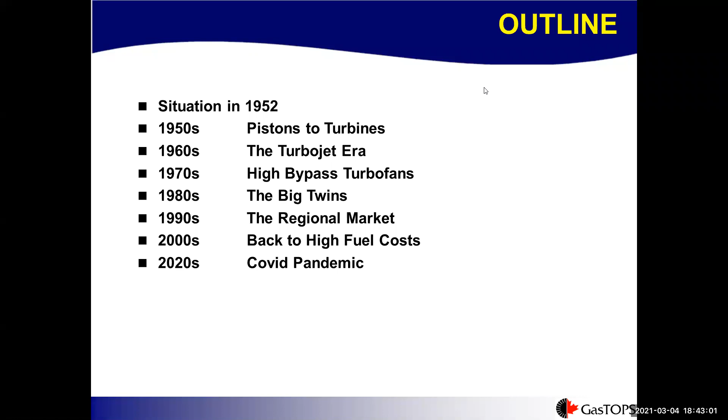So in fact, the Carleton students who are here, most of you would be born around about 1998, 2000 or thereabouts. And the 777 came into service in the late 1990s. So not much has changed since you were born. But we'll talk a little bit more about that. Next slide, please, Omar.

If you go back to 1952, every crossing of the Atlantic, nearly all went by ship. The air market — there was a small domestic US market, very small transatlantic, and negligible, I think in fact zero, trans-Pacific. And of course rail was transcontinental and local.

Now, I came to Canada in 1955, and nobody would have thought then of making a day trip from Toronto to Montreal or Toronto to Ottawa. That was an overnight trip by train. Next slide, please.

There was no leisure travel in the 1950s except for the mega rich, and there was no business travel. What drove travel in the 1950s was large-scale immigration. At the end of the war, there was very large-scale immigration from war-torn Europe to North America, to the States, to Canada, to South Africa, to Australia, to New Zealand. And that was all done by boat.

Immigrants didn't come by aeroplane. One of the common expressions of denigration about immigrants is, oh, he's just off the boat. And I was one of those too. So, next slide, please.

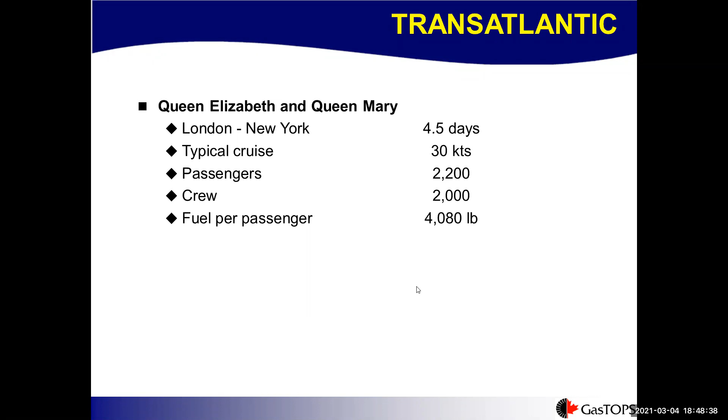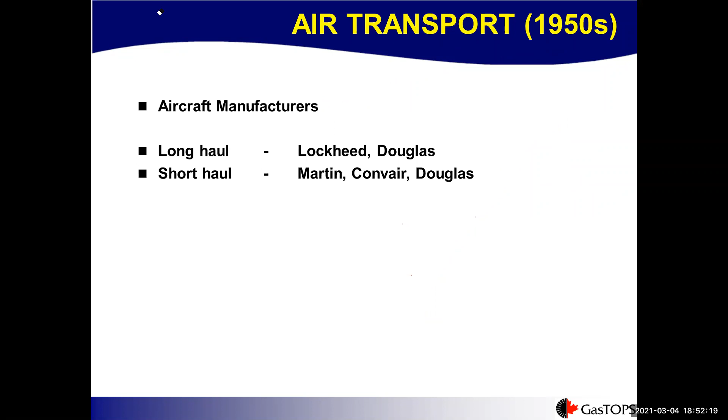Now I want to show you how the whole air transport business and the civil propulsion business has changed over the last 50, 70 years actually. In the 1950s, the major aircraft manufacturers were Lockheed and Douglas. The short-haul aircraft manufacturers were Martin, Convair, and Douglas.

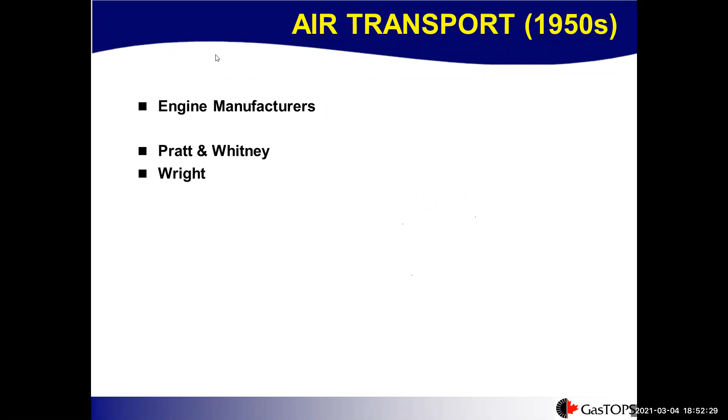The engine manufacturers were Pratt & Whitney and Wright. The dominant airlines were Pan Am and Trans World Airlines. The dominant aircraft were the Lockheed Constellation and the Douglas DC-7.

Now, if you look back at these last three slides, things have changed a lot. Probably most young people have never heard of Convair or Martin, except we now know of Lockheed Martin. Wright is not in the business anymore. Lockheed is out of the business. Douglas is out of the business. Pan Am and TWA both went bankrupt.

You notice I didn't mention a few names like Boeing, Rolls-Royce, General Electric, and Airbus, who have now essentially become a very large part of the current market. It boils down to the fact that companies that didn't remain competitive with their products eventually disappeared. So you have to remain very active in research and development to keep going.

All these were household words when I started in the business. A lot of them have gone now. People like Boeing, GE, Airbus, and Rolls-Royce have appeared in the market.

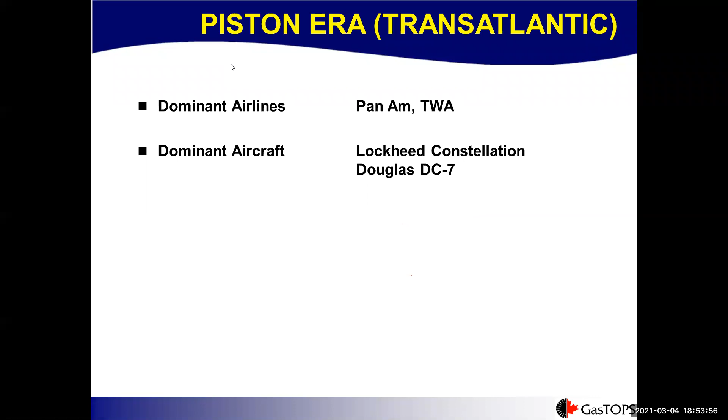Now, this was Air Canada. Air Canada flew with the Lockheed Constellation, which is a beautiful aeroplane. But my first transatlantic crossing was well over 14 hours with a stop in Iceland.

My first crossing was from this end and coming back. Coming back from Glasgow to Toronto, I had the misfortune to come on a Lockheed L1049H - those of you who might recognize the H, that's the cargo version of the Lockheed Constellation. Quite apart from no in-flight entertainment and no back-of-the-seat screens, there were also no windows, so it was an enclosed tube. You sat beside this vibrating wall for 14 hours. And I can assure you it's much, much better to fly in a modern aeroplane than it was in those days.

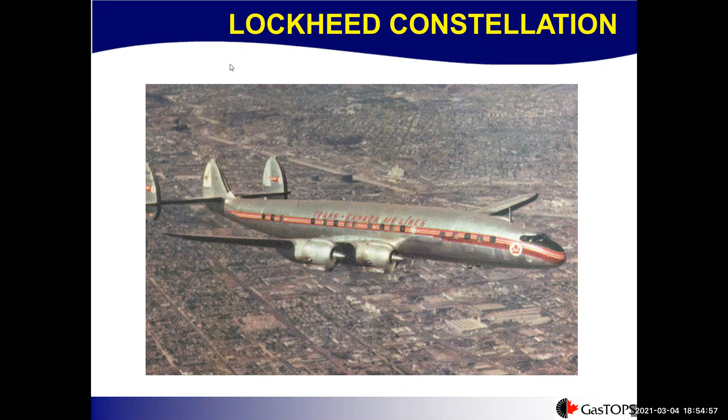Now, these again were numbers I worked out on the back of an envelope as best as I could. The typical cruise speed of the Lockheed Constellation was about 275 knots. Difficult to handle the number of passengers, but about 74 was the best reasonable estimate I could get. And it had a flight crew of 5.

It's important to realize this flight crew of 5 consists of 2 pilots, a flight engineer, a navigator, and a radio operator - that didn't count the 2 or 3 stewardesses in the back. And again, estimated fuel per passenger was about 520 pounds - that's just a good estimate. But you see, that's already about 8 times better than the Queen Elizabeth or Queen Mary. And of course, in those days, nobody worried about fuel or the environment in the slightest.

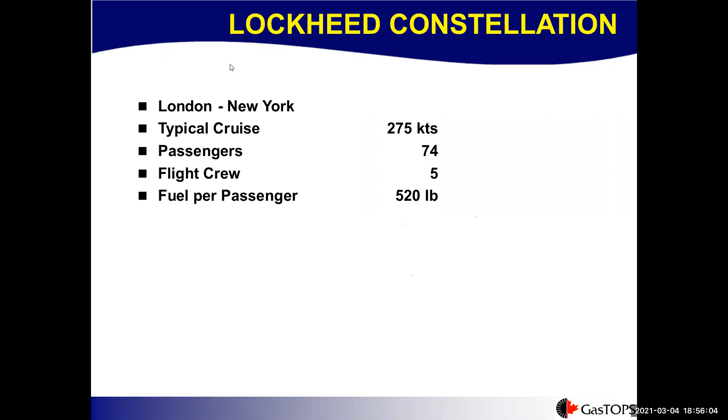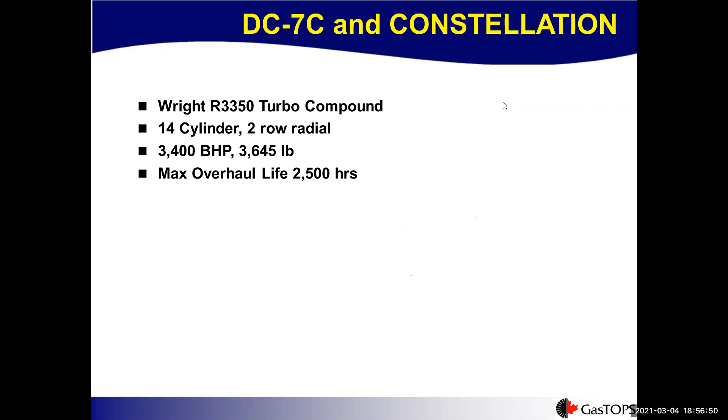The DC-7C and the Constellation both had the Wright R-3350 turbo compound. We much later had that in the Argus, the CL-28, a 14-cylinder 2-row radial, basically about 1 horsepower per pound. Now, those engines had a maximum overhaul life of 2,500 hours. They very seldom achieved that, and it took them 17 years to get there. But the point was that they couldn't go beyond 2,500 hours. That sounds like a pretty silly number by today's standards, but that's the best you could get with these piston engines.

Now, the interesting thing about the Stratocruiser was that Boeing built only 55 of these. It was actually based on the wing of the B-29 bomber, and 13 of these finished up as hull losses. It could carry, I think, 61 passengers across the Atlantic eastbound and 55 westbound, again because of the wind.

There's a very good paper where the chief engineer of Pratt & Whitney said the in-flight shutdown rate in the R4360 was simply intolerable. It was too dangerous even to quote a number on it. So, next slide please.

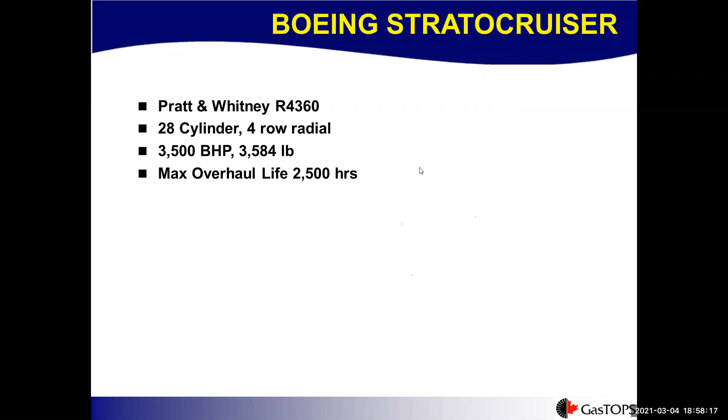So the transition to turbines: the Constellations, the DC-7s, and the few Stratocruisers started to open up the market. But people began to realize that maybe the day of the piston engine was coming to an end. So there were two camps that opened up, turboprops and turbojets. When I was a student, there was a great argument going on about which was better, the turboprop or the turbojet. In fact, the answer was the turbofan.

But the point was, in Britain, they came up with two turboprops, both quite successful. The Viscount, and in fact Air Canada was, I believe, the biggest ever user of the Viscount. The Viscount came on the scene just before I got to Canada. They also built the Britannia, which was in fact a long-range aircraft, and it sounds incredible today, but the Britannia actually did non-stop flights from New York to Tel Aviv.

Lockheed also went for turboprops with the Electra, intended for internal use within Europe and North America—a fairly restricted range aircraft. Unfortunately it had a major flutter problem with connectivity between the nacelles and the wing, sufficiently serious that the wing came off, and the Electra was a commercial failure. Of course, the Electra became the father of the P3, and we still have P3s flying 70 years later. They're coming to the end of their lives too.

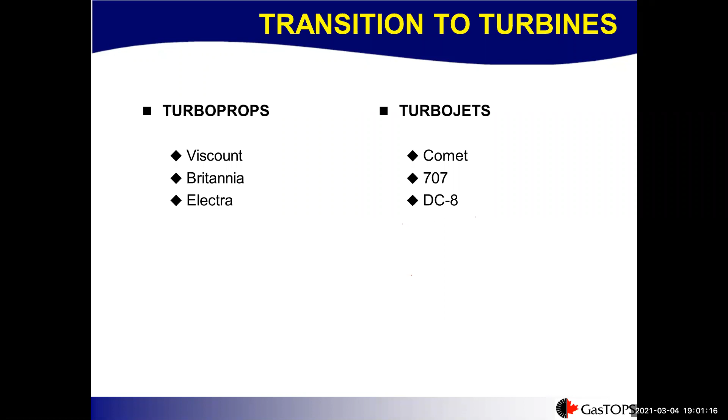Okay, if you look at the turboprops: the Viscount had the Rolls-Royce Dart, a two-stage centrifugal compressor. The Britannia had the Bristol Proteus, an axi-centrifugal compressor. The Electra went with the Allison 501, all axial, and the last big turboprop was the Vanguard with the Rolls-Royce Tyne, which was all axial. The Vanguard is interesting—there was a very good paper in the CASI journal, way back in the mid-50s, by Jack Diamond, who was the chief engineer of Air Canada, about the Vanguard.

And it didn't even mention propulsion as being important—fuel was simply not important in those days. The Tyne was in fact quite a big turboprop for its day, 6,000 horsepower, and it became later used a lot in naval engines as well. Next slide, please.

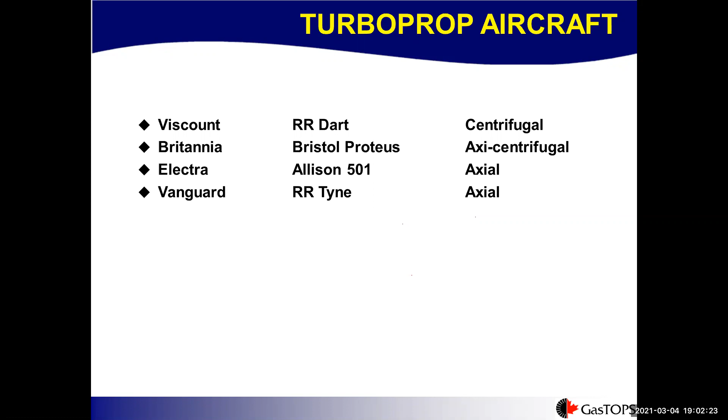This, in fact, originated in the Bell Airacobra P-39 World War II fighter, where the engine was mounted quite far back with a very long drive shaft forward to the propeller, running in between the pilot's legs. The T-56 has been a remarkably successful engine—there are still lots of them around. It's been developed to higher and higher standards, with at least 12 to 15,000 built. So, next slide please.

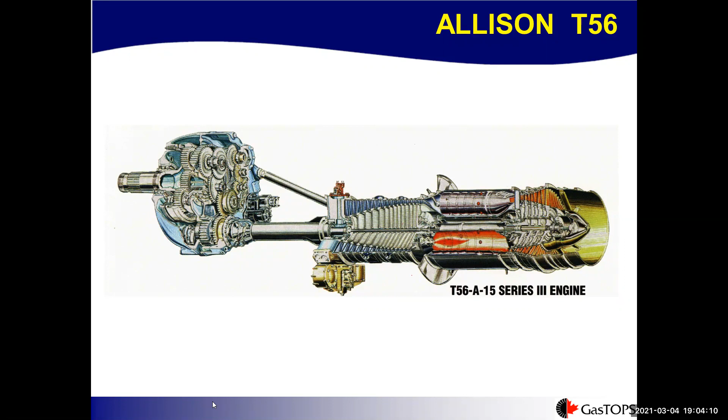Now, the Vanguard was fast, it was reliable, it was very safe, and they sold a grand total of 43 to Air Canada and to British European Airways. So it was actually one of the very first aircraft that was, when it was being designed, in fact referred to as an Airbus, something to provide cheap transport, and it was a complete flop in the market.

Okay, so then we leave the turboprops just now. We'll come back to it a bit later. But the transatlantic service by jet started, I said, October the 4th, 1958.

There's a very important date, that in 1958 the Atlantic passengers by air exceeded those by ship for the first time. And what really happened was that the ship market peaked in 1958 and disappeared rapidly, whereas the aircraft market just kept on growing and growing. And the speed and economics of the initial jets brought the cost of fares down, and it made it possible for the working stiff to go for a 2 or 3 week holiday to Europe for the first time ever.

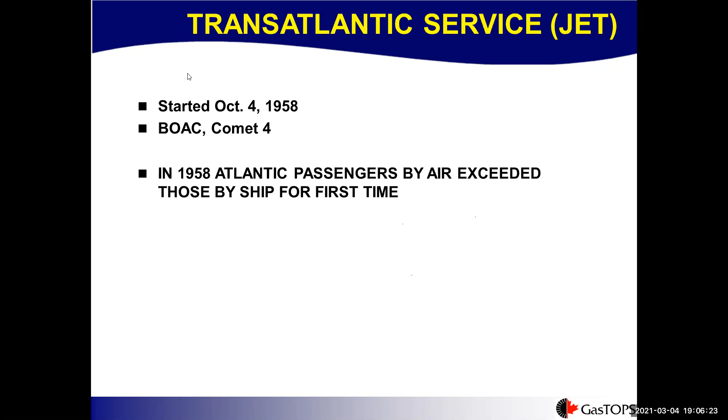Now, I grew up on the Clyde, which was the world center of shipbuilding. I was as interested in ships as I was in aeroplanes, and I could never have guessed that 10 years after I graduated, basically the building of passenger ships was finished. Now, we still have passenger ships, of course, but they have nothing to do with transportation. They're floating resorts. Cruise ships are just basically hotels that move around.

Now, if you look at the sea versus air picture, in 1958 they say that air travel exceeded that by ship. The QE2 was the last big liner built in the UK, launched in 1967. The original Queen Elizabeth was withdrawn in 1968. The United States built a large, very fast liner called the United States, which only did about 10 years in service before it was withdrawn.

And the ship traffic was basically killed by the jet engine. One of the things that killed the ship traffic was that a great deal of the market was the immigrant trade from Europe, particularly to Australia. And the Australian government found it was much more economical to rent a 707 and fill it up with people and fly them to Australia in a day and come back. That wiped out ship traffic literally almost overnight.

The Dutch, in fact, also had a lot of these ships that would come back - they'd go full of immigrants one way and go back almost empty. But they did, in fact, carry a lot of cargo and the Royal Mail, which kept them going. But that traffic pretty well disappeared and was totally replaced by long-haul jets.

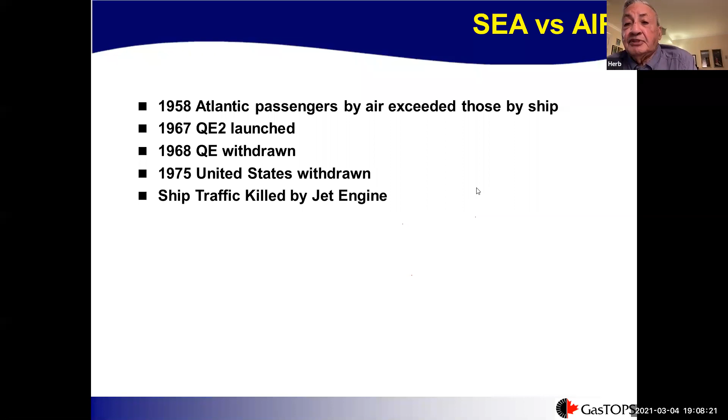It's interesting that the year after I was born, they opened the air route from London to Sydney, known as the Kangaroo route. And younger people find this hard to believe, but when the Kangaroo route opened in 1934, it took 42 stops to Australia and took 12 days. So we've certainly made some progress from there.

Now let's look at the early jet-powered aircraft. The Comet 1 had the de Havilland Ghost, which was a centrifugal compressor engine with a low pressure ratio and quite inefficient. The 707 had the JT3, which was in fact a civil version of the J57 military engine. The Comet 4 had the Rolls-Royce Avon, which was also started as a military engine. And the DC-8 had the JT4, which was a civil version of the J75. And of course, the J75 was used in the prototype of the Avro Arrow.

It was certainly clear that for a big efficient engine, it was going to be all axial, and the centrifugal was just something to get things going. It was much earlier and quite inefficient. They did, in fact - the Comet, British Airways, or BOAC as it then was, actually did fly the Comet from London to Tokyo with 9 stops, and from London to Johannesburg with either 5 or 6 stops. So again, totally different from what we know today.

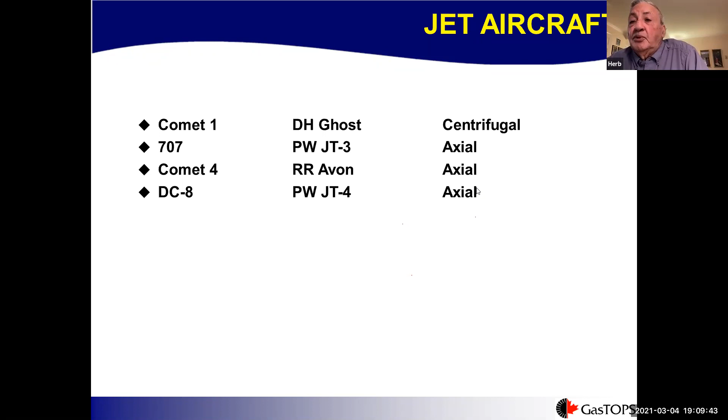Next slide, please, Homer.

Now, if we look at the pressure ratio, turbine temperatures, and thrusts of these engines, they seem quite ridiculous by what we know today. Pressure ratios of 10 or 12, turbine temperature 1150, 1135, 1205. Now if you look at a modern civil engine with a pressure ratio of 60, the compressor delivery temperature is about 1100 Kelvin.

And the pressure ratios have gone up from 10 to 50 or 60, and thrusts have gone up to about 115,000 pounds, the maximum so far. Next slide, please.

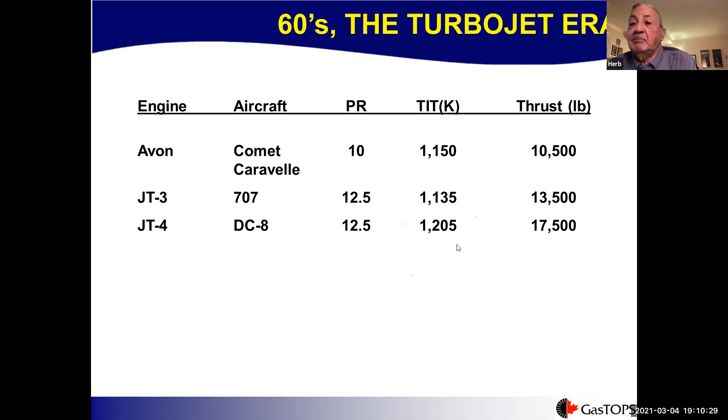The problems with the turbojets were, first of all, the SFC, specific fuel consumption, which is a measure of the thermal efficiency of the engine and includes the propulsive efficiency, but also the high noise problem. Both of these problems resulted from high jet velocity. So the solution to improve the SFC and reduce the noise was to increase the airflow and decrease the jet velocity.

So basically thrust is fundamentally just the mass flow into the engine times the change in velocity. So you can either have a very large mass flow and small change in velocity, which is what the propeller is doing, or a small mass flow with a very high jet velocity, which is a straight jet engine. The turbofan, as we know it today, is in between these and has led to tremendous increases in performance over the years. Next slide, please.

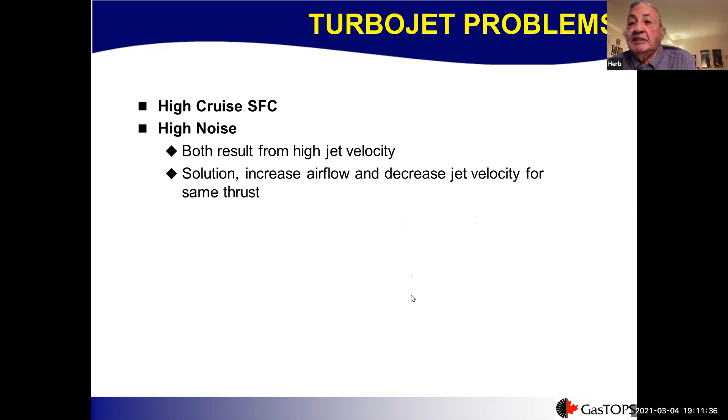So if you look at the early turbofans, the JT3D was in fact a modification of the J-57 to put a fan at the front, and that went on to both the 707 and the DC-8. And the thrust, you see, went up to 18,000 pounds.

The JT8D was a conversion of a smaller military jet engine. Forget which one it was, I think it was the J-58... no, it wasn't 58, never mind. But the point was the JT8D went into the 727, the DC-9, and the 737.

Now if you look at that there: 707, DC-8, 727, DC-9, 737, that is about 95% of the civil market. Pratt & Whitney owned that market. Rolls-Royce had a tiny, tiny share. GE weren't there at all, and Wright had disappeared by this stage. So Pratt & Whitney had domination of the market like nothing's ever been seen before.

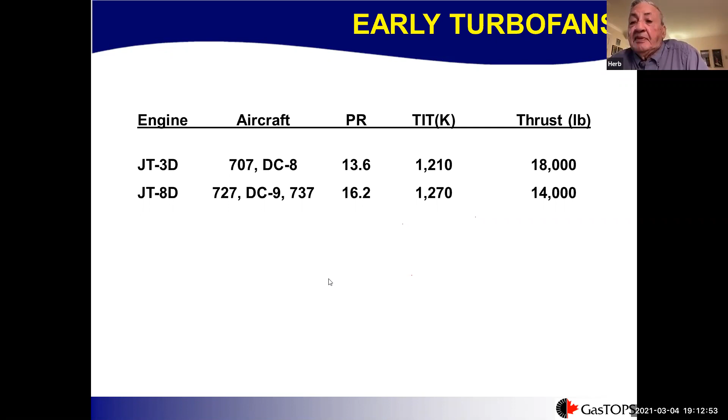Next slide, please. Okay, this is the JT3D, which has got the two-stage fan and a low bypass ratio, a bypass ratio just over 1. Next slide, please.

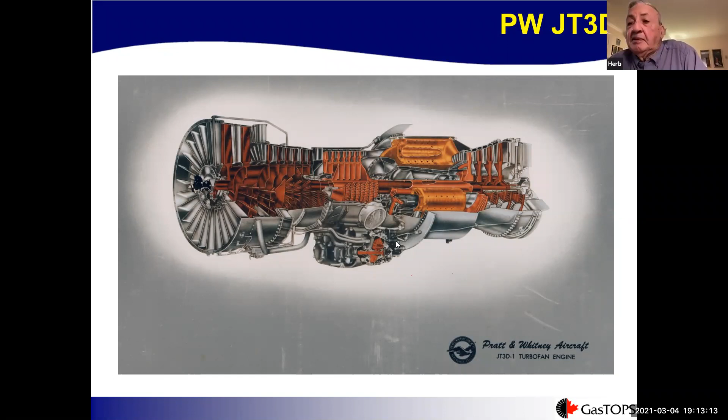Again, the JT8D has a very low bypass ratio, a bypass ratio of about 0.8, I think it was, on the JT8D. But that was, in fact, for a long time, the most widely produced engine in the world. Now the JT8D is pretty well all gone now. There were still quite a lot of them around in the 737-200. The 727's been gone for quite a few years.

And what was First Air and then Canadian North did fly JT8D-powered 737s up until quite recently, but they're pretty well all gone now. Next slide, please.

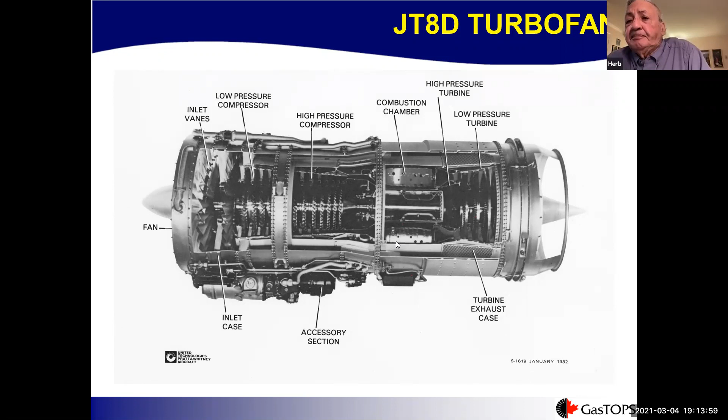So for turbofans, what we wanted to do was increase the bypass ratio to improve the SFC and lower the takeoff noise. There were a lot of problems with the design and introduction of big high bypass turbofans. You needed long fan blades. There were big problems with 3D aerodynamics. People didn't know enough about the high Mach numbers at the blade tips or the tendency of the flexible blades to untwist.

Materials were a problem, particularly with bird strike resistance. And if it was not for titanium, we could have never gone to the big turbofans. If you'd made the fan blades out of aluminum, they would have been unable to withstand the bird strike. And if you'd made them out of steel, you could have never made a disc strong enough to hold the blades with the diameters needed.

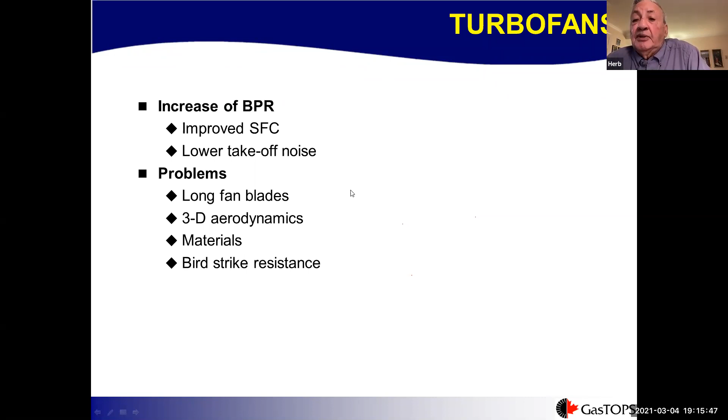So we started off with solid titanium blades with dampers halfway up, or two rows of dampers. We finally moved to wide chord blades without dampers. We went to hollow blades, and you may have heard just a week or so ago there was a fan blade failure on a 777 on a Pratt engine. But the point was that titanium was the key to being able to go to a high bypass ratio. Many years later, we finished up going to composite blades, and we're still getting better at that, but they've been in service for quite a long time now. Next slide, please.

Now the large turbofans, particularly the high bypass ratio ones, started with the military transport program in the US, the C5A. And GE came up with the TF-39 engine with the unheard of bypass ratio of 8. Look at the next slide, please.

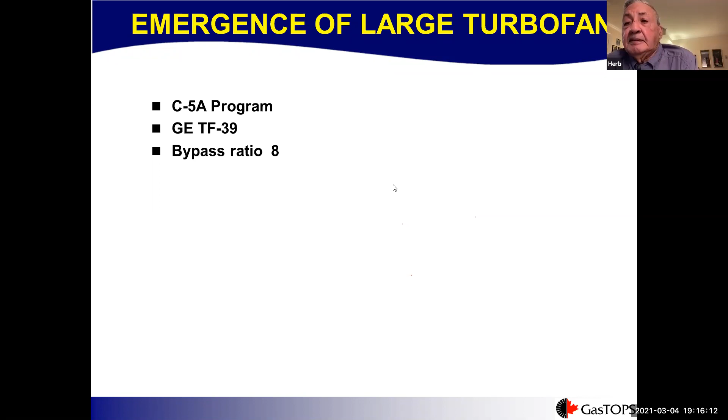...the General Electric LM2500, which has been the most successful aeroderivative engine ever built, and they're still building lots of these. In the case of naval ships, they have the 6-stage turbine with a gearbox to drive the propeller. But if you want to drive a compressor in a pipeline, you'd have a 2-stage turbine running at much higher speed, directly coupled to the compressor.

But that basic architecture of the TF-39 was ideal for the C5. For the C5, they wanted good short field performance, but weren't so concerned about cruise speed, and weren't the least bit concerned about noise. But that was unsuitable for a civil engine, and all civil engines, for noise purposes, have to have a single-stage fan. Next slide, please.

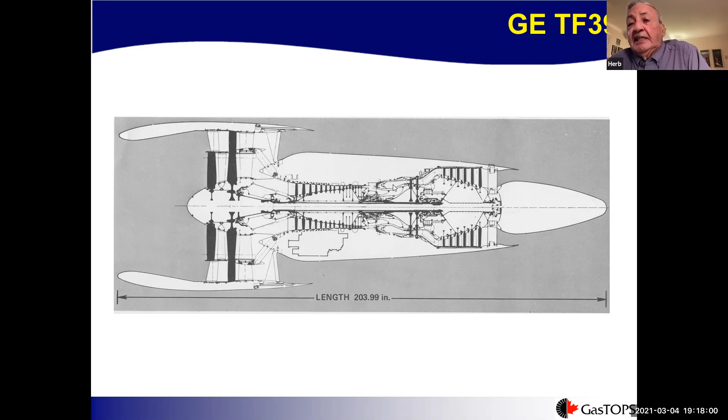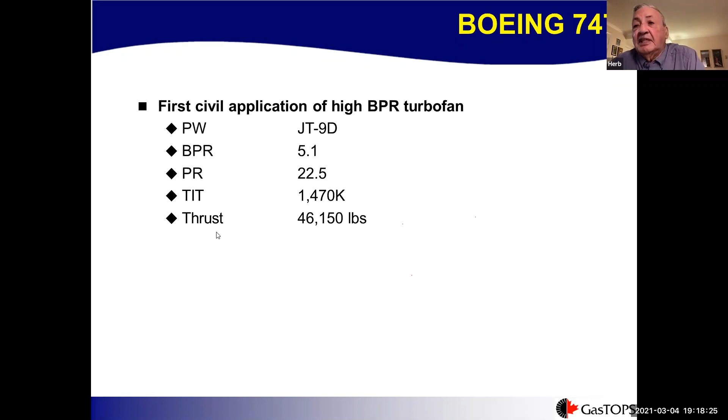Now, Douglas and Lockheed didn't want to get left behind on the high bypass wide body, and they came up with a couple of competing tri-jets, the DC-10 and the Lockheed 1011. The DC-10 went with the GE CF6-50, which was a bit like the TF-39 with a single-stage fan, and the Lockheed 1011 went with the Rolls-Royce RB211, and the cycle conditions were pretty much the same on all of these.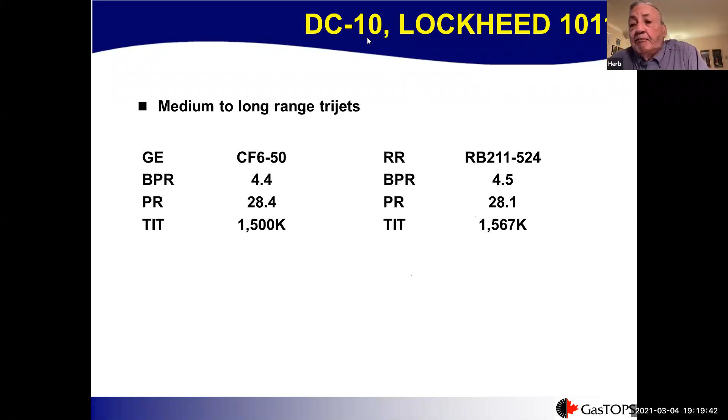The big difference with the Rolls-Royce engine was they went to a 3-spool engine. The interesting thing is that architecture on the GE engine and the Rolls-Royce engine has lasted for the last 50 years, more than that actually. And Rolls are just now looking at this Ultrafan where they've gone to a completely new architecture. I believe GE are looking at a geared fan engine, but nothing has that yet. I believe they will have to be, because with the increasing bypass ratios people are going to, you eventually have to go to a gearbox because the low pressure turbine becomes so massive. So the next slide, please.

Now, there were some terrible reliability issues when these first came into service. Turbine blade life was a major problem because the blade temperatures were much higher than we'd had before. They required the use of advanced cooled blades. And I know that when British Airways first introduced the 747s, they were having to change out a high pressure turbine once a week because the blade life was so poor. And that was not a Pratt problem - that was a problem with all of them because of the high temperatures.

But a particularly odd problem on the JT9D was the engine had been perfectly good, tested on test beds, but when they actually mounted it on the pylon on the 747, when it went to full power, the casing went oval. This meant they had to open up all the tip clearances, and that cost Pratt & Whitney a huge amount of money to put right, because the performance of the engine lost so much from these big tip clearances.

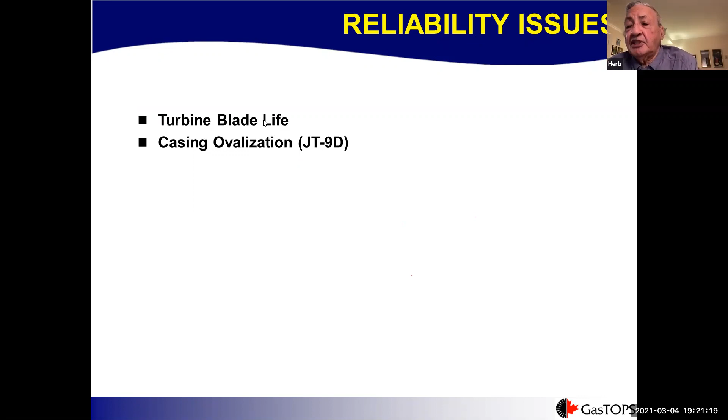But all of the big engines to start with had reliability issues. Now I should point out, I'm not going to throw boulders at any engine company, because what you find happening is that when you go to a new engine and push the technology to higher temperatures, higher pressure ratios and higher speeds, you're going to have trouble, period. Doesn't matter who you are. It's a case of how long it takes you to fix them. Okay, next slide, please.

Now, nobody was very keen on the idea of going to 3-engined aircraft across the Atlantic. I actually went on a DC-10 across the Atlantic the day after it had its certificate of airworthiness restored. The DC-10 lost its C of A for quite a long time because of structural problems, with the floor collapsing and interfering with control cables and whatnot. But anyway, the Lockheed 1011 and the DC-10 were initially conceived as transcontinental aeroplanes, like London to Los Angeles, New York to San Francisco, that sort of thing, but not transatlantic. Nobody in their right mind would have considered twin-engined aircraft across the Atlantic. And I know for sure that when I first crossed the Atlantic in a 3-engine aeroplane, I was none too happy about it, especially since a lot of these engines were designed by guys that I taught, and they were no smarter than I was. Next slide, please.

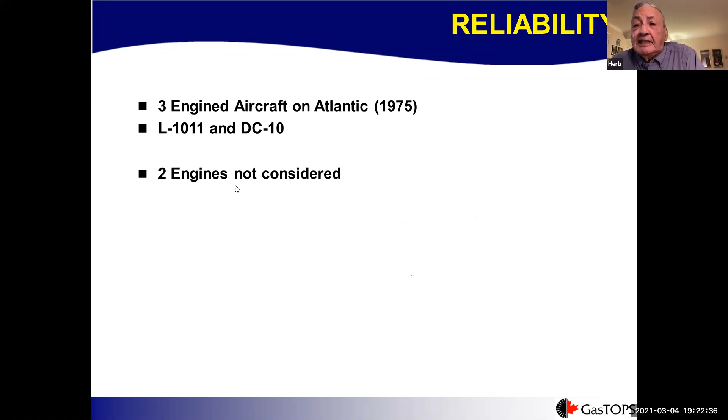Now this is interesting about reliability. As I mentioned earlier, the large piston engines had a 2,500-hour overhaul life after 17 years. But the JT4, the first big jet engine, the J75, in service after only 3 years, had achieved 3,400 hours overhaul life.

For quite a long time now, engines have achieved 40,000 hours on wing without being removed. This was done first with Icelandic on an RB211 and 757, and later with Malev on a B737. I think somebody recently, TUI in Germany, with the CFM56 and the 737, got over 50,000 hours. Now that's an astonishing feat.

I have read that the average time for a CFM56 before it goes for its first shop visit is 22,000 hours. It may be even higher than that. That's an incredible level of reliability.

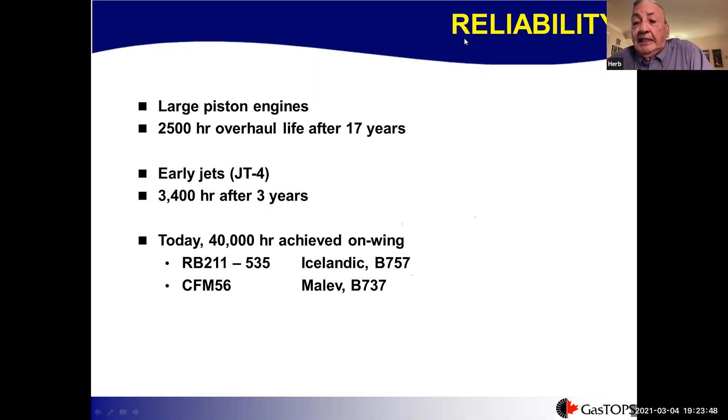The big twins. Now, Airbus were the first to come up with a big twin, and it made its first flight in 1972. At that point it was a short to medium range aircraft.

Now, this was poo-pooed in the US. I was as polite as possible at the Guggenheim lecture when I said there was considerable doubt in the US about large twins. They basically poured scorn on this and said nobody but these daft Europeans would build a big twin. And then they realized maybe once the engine reliability got better, it wasn't such a bad idea after all.

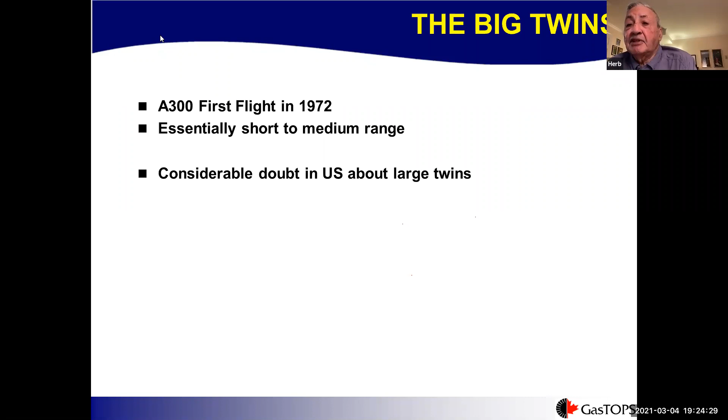ETOPS, extended twin overwater operations, started in 1987 with the B767 and the A310. Now, the A310 was never really designed as a long-range airplane. I remember a CASI lecture when somebody from Airbus came to give a talk on the A310, and they couldn't get their slide into the projector, had to use a screwdriver to push it in. They were so determined to show that the A310 had a much smaller wing than the B767, and that was the reason why it didn't do very well.

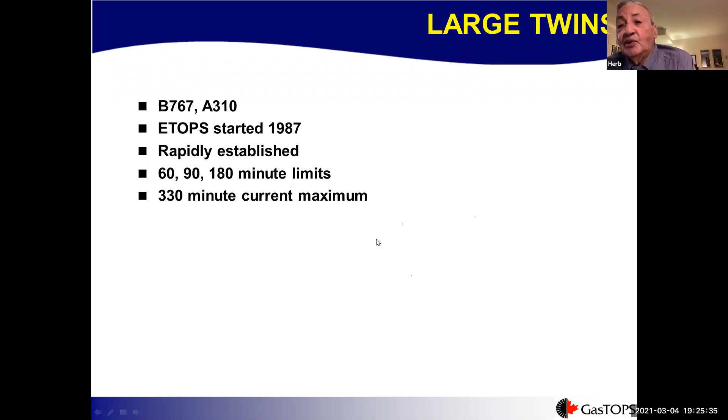Boeing had a big wing to start with, and they rapidly established increasing range. We started off with ETOPS 60 minutes, rapidly extended to 90, 180 minutes, and now we've got to the 330-minute current maximum. That's quite incredible when you think of it, 5.5 hours on one engine, carrying all the extra loads and whatnot that would have been carried by the other engine.

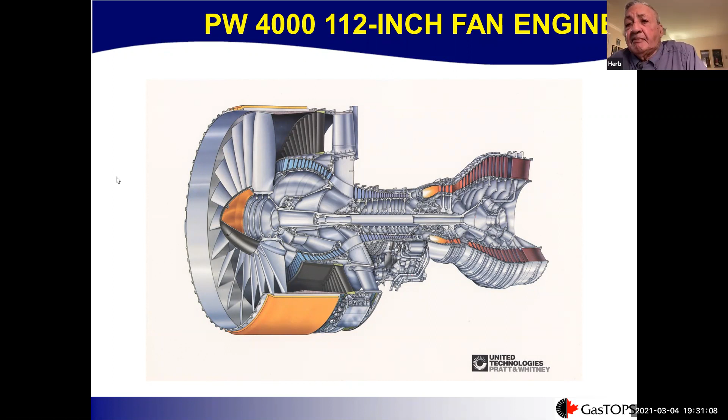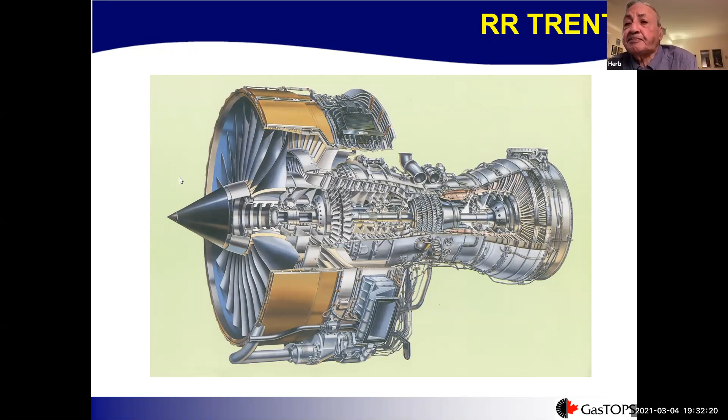Now, the geared turbofan developed by Pratt & Whitney, when they say 15 to 20% improvement in fuel efficiency, that is true, but it's based on the engines of 10 years ago. We're at a stage now where it's very, very hard to get even a couple of percent improvement on SFC. And everything you do to improve the SFC is going to affect the reliability and also the cost of the engine.

The gearboxes take a lot of power, 20 to 50 megawatts. The ultrafan that Rolls are looking at, they've already tested the gearbox to something like 80 megawatts, which is enormous power. Although the geared turbofan has had a lot of early reliability issues, quite a few in-flight failures, the interesting thing is I don't know of any related to the gearbox. A lot of them have been in the low pressure turbine, because they went to newer materials in the LP turbine, titanium alloys in the last stage. But the point is the gearbox appears to be highly reliable.

For the young folk in the audience, the geared turbofan has had a great deal of acclaim recently, and quite a lot of people think it's something new. But in fact the first successful geared turbofan was the AiResearch TFE731 business jet engine, which was certified in 1972, and at least 12,000 have been built. So the geared turbofan has actually been around for almost 50 years.

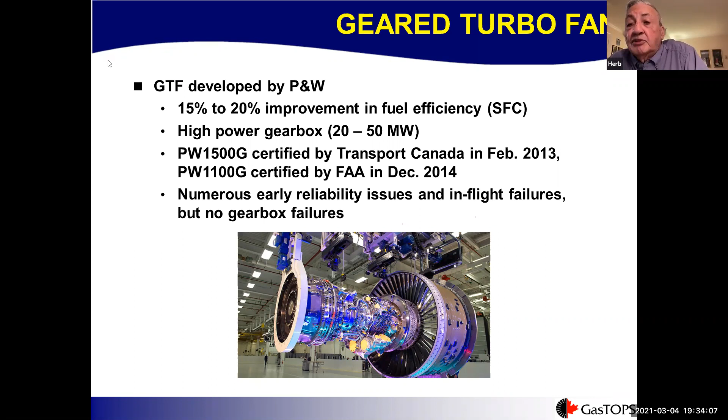Okay, latest single aisles. The A220, of course, was the Bombardier CS100. That's got the geared turbofan. The A320neo has got a choice between the LEAP engine and the Pratt & Whitney turbofan.

Now, the interesting thing is that when the geared turbofan came out, it was claimed this was a game changer, so much better that nothing could compete with it. The fact is, the latest numbers I've seen on the A320neo show the split is something like 60% LEAP and 40% Pratt. Just recently, one of the big American airlines, Frontier, switched from using the LEAP engine to the Pratt engine, but just before that, one of the big Indian airlines, Indigo, switched from Pratt to the LEAP engine. Maybe I got that the wrong way around, but the point was there were two big swaps, and they went in opposite directions.

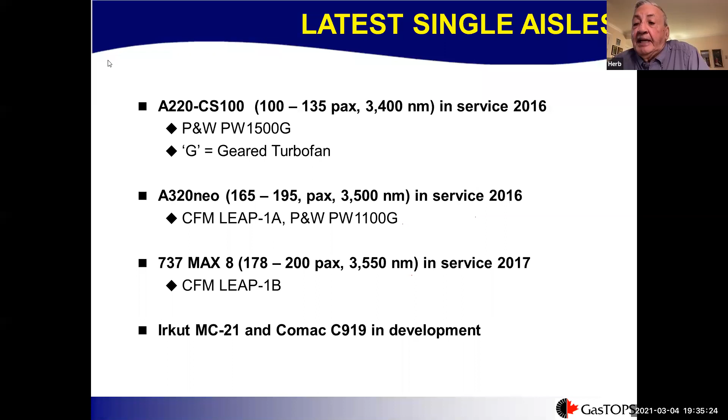But on the other hand, see that LEAP is also in the 737 MAX, so they've got a much bigger market than Pratt in that field. Well, next slide, please.

Now, we'll go through these a bit quickly. In the 1990s, the regional market opened up and there were a lot of turboprops. The small market was shared by Pratt and Garrett, who are now Honeywell, started off as AiResearch, they're now Honeywell. And there was the PW100 and the General Electric CT7 based on the T700 turboshaft engine, a military engine, which shared the bigger market. But the point is that eventually that market is now only the PW100 series, the PW100 and the PW150.

But there were the Dash 8, the British Aerospace ATP, Embraer 120, Fokker 50, Dornier 328, and the ATR 42 and 72. Now, all of these have gone now except the ATR and the Dash 8. And the Dash 8, I'm afraid, is very nearly gone.

There's only a very small backlog. And Air Canada have just announced last week that they're ditching their entire Dash 8 fleet with one of their subsidiaries. And Porter have been shut down with the Dash 8-400 for over a year. There's not anything wrong with the aeroplane, it's just the way the market's gone.

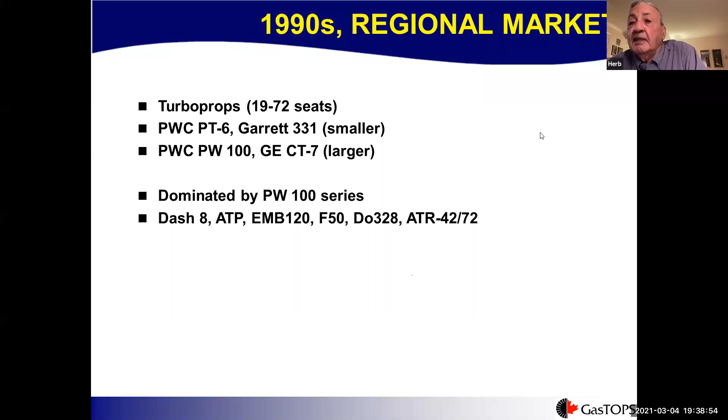Okay, if you look at the regional jets, in fact just last week or a couple of weeks ago, I saw that Bombardier had just delivered the last CRJ to be built. And it's rather startling, not many people realize this, that Bombardier built 1,945 CRJs. That's a huge number.

Embraer built a small airplane, the 145, which was based on the little turboprop's fuselage, with jets replacing the turboprops. And that did very well, but it's really too small an aeroplane.

One of the interesting things is we recently had two aeroplanes hydroplane and overshoot the runway in Ottawa in heavy rain. And they were in fact both Embraer 145s. And one of the key things interesting about that is that's one of the few modern commercial aircraft that doesn't have thrust reversers. Okay, next slide, please.

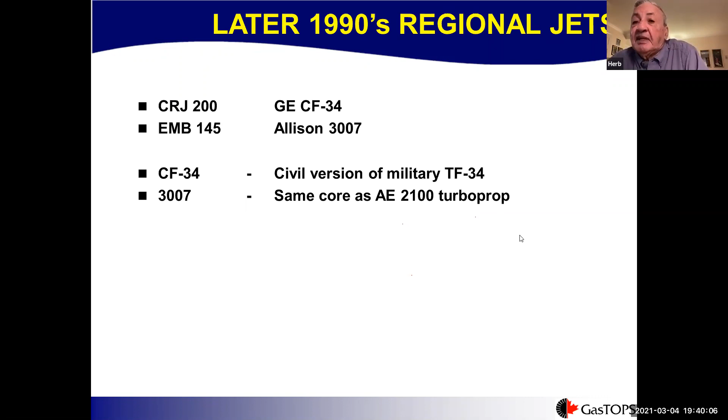So anyway, the 50 to 70 seat regional market is dead. And a lot of this is because of the US airline pilots unions about how many people you can put in a regional jet, and particularly what the weight can be. So that the market is very small.

Embraer have extended their market from the E175 up to the E195. They've sold a few in Europe. They're onto the same limitations, but virtually none in the States. And the Mitsubishi programs, which have been going on for years, have pretty well been cancelled. I'd say the Q400 backlog is only 17.

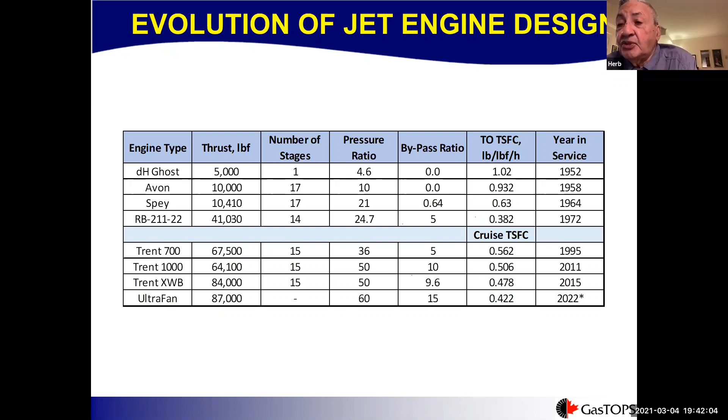I have heard that the takeoff turbine inlet temperature on the Trent XWB is 2000 Kelvin or higher. That's a temperature I can't believe, but you're well above the melting point of the base material. So if your cooling goes wrong, you're a dead duck. Next slide, please.

So you're talking about future projects. Rolls-Royce are talking about this UltraFan, and they're building a demonstrator engine using a power gearbox architecture. They say a 25% reduction in fuel burn, but that 25% is relative to the Trent 700, which has been in service since 1995.

And the Boeing 5X, based on the new mid-market aeroplane that Boeing have been whittling away at for a long time, trying to come up with an aeroplane here. Meanwhile, Airbus have sold God knows how many A321 XLRs, and Boeing have got to get off their duff very quickly to be able to compete in that market.

But the fact is that we're at a stage now where it's very difficult to see somebody building a brand new engine, because we're running into a new concept where there's so much environmental pressure, particularly in Europe, that maybe a gas turbine is no longer viable in short-range markets. That's possibly where electrical propulsion may come in.

I don't think electrical propulsion is going to come in on large aeroplanes. I can't see how they're going to do that unless with a gas turbine to provide the power to charge the batteries. But I think there's a lot of work going on looking at hydrogen.

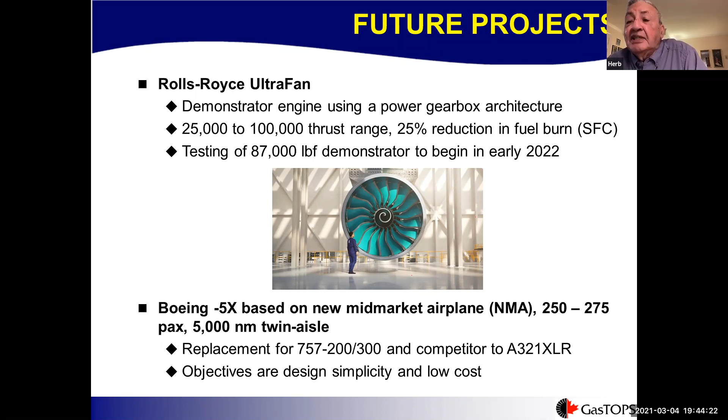I'm still waiting to see that arrive, and I've been retired for 20 years now. I think that's the last slide, Omar. Is there one more? Next slide. Yeah, the state of the industry.

I say the pandemic has really caused utter chaos. If you look at Air Canada, it posted a 73% decline in passengers — in fact, I thought it was more than that. Many airline bankruptcies — Flybe in the UK were the largest Q400 operator. Rolls-Royce downsized 17% of its workforce, and GE have done the same.

Of course, the 737 MAX shook public trust in the certification process, and concerns over climate change will drive R&D investment in technology. We're looking at things like more electric, sustainable aviation fuels, and hydrogen. And there are all sorts of infrastructure problems associated with all of these.

So it's difficult to see somebody at the present stage starting a brand new engine with the technology we know now. I certainly, if I was leading any major engine company, would say this is the time to be spending and looking at baseline research to see what the problems are, and not commit to an engine just now.

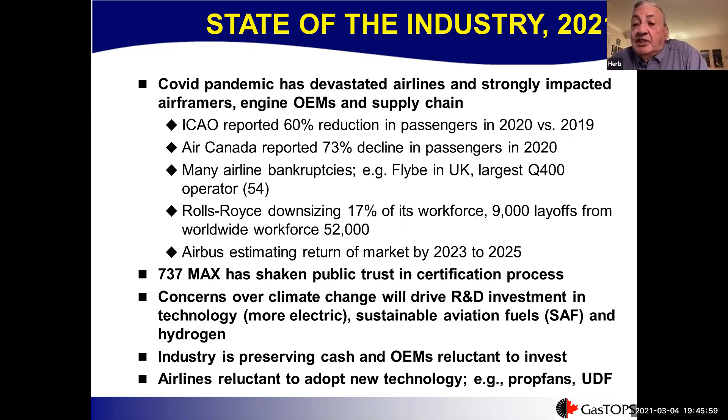And airlines, of course, you can come up with a really hotshot new technology and airlines say, don't want to know about it. We like what we've got, we're used to it, and any brand new technology, whatever it is, is going to be trouble. Next stage, next slide.

So there's the conclusions. The most important conclusion is that it's revolutionized the way we travel, made world travel available to the mass market. When I left Glasgow to come to Canada, I thought I might conceivably make a couple of trips in a lifetime. I've actually made about 150 Atlantic crossings.

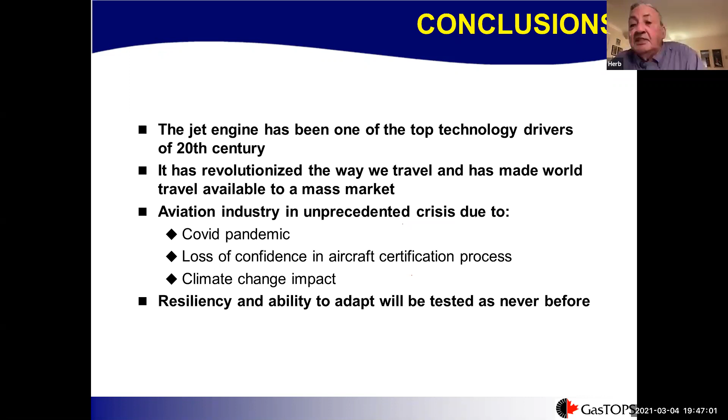I mentioned that I got this achievement award from ISABE last year, or the year before, and I had to go to Canberra and back in a week. I went business class, and it was a whole lot better — 14 hours from Vancouver to Brisbane in a 787, which was a whole lot better than 14 hours across the Atlantic in a Lockheed Constellation. So I'll stop there and answer any questions.